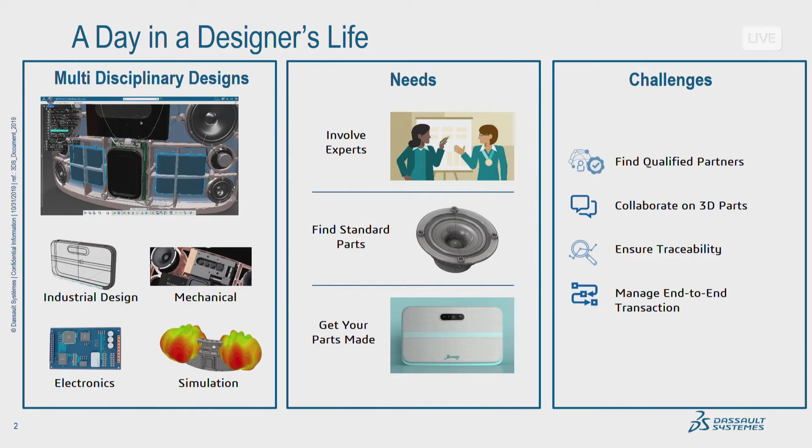The challenge we see in your usages and feedbacks is that today all the designs you do are more and more complex and involve more disciplines and expertise. Sometimes that expertise is not available in-house, or we need extra capacity. So the point is to help you find the right experts in your disciplines, find the right components for your designs, and help you get your parts made, whether this is for prototyping, functional parts, or process qualifications.

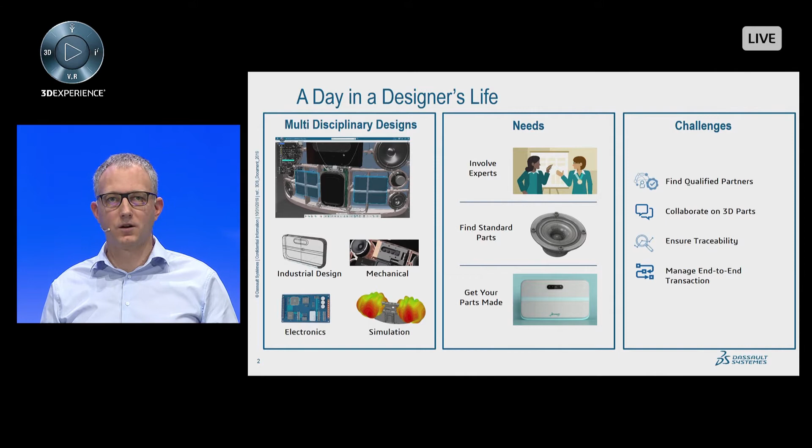And so those needs and challenges - to find the right expertise, to be able to trust the partners with whom you want to work, to collaborate efficiently in 3D on those projects, to have complete traceability of that collaboration, and to manage end-to-end transactions - are at the heart of the creation of these marketplaces that we introduced a year and a half ago, in early 2018.

So this is why we created those 3 marketplaces. The idea is really to go into dedicated domains and bring specific values into those domains, including values that are currently delivered through the applications you use daily.

Then you also have engineering, which is about on-demand engineering design, delivered by qualified ecosystems of engineering providers, engineering offices. And finally, we have PartSupply, which is the focus of today's presentation, about on-demand components to facilitate your design.

So those online services can be freely accessed online. Just go there, you have the URLs here on the screen. Create an account for free, and you can start interacting with these ecosystems for your manufacturing, engineering, or component projects.

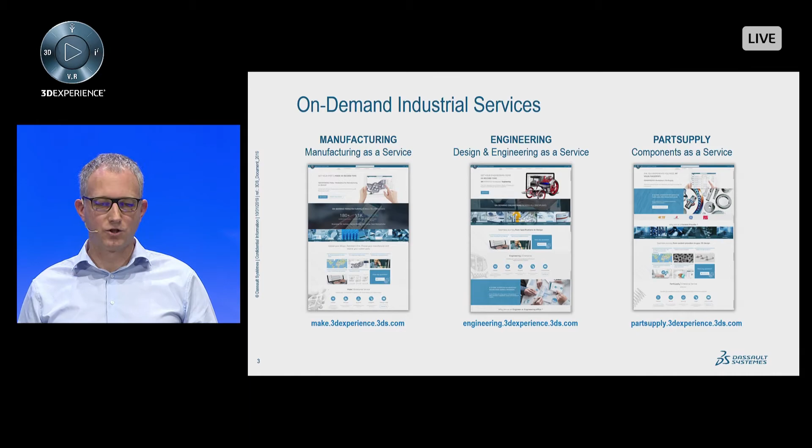Something I would like to emphasize is that those services are available in 2 flavors. The community ones are the ones just described - you go to the websites, and everyone gets access to that same ecosystem of providers qualified by Dassault Systèmes. They're also available in an enterprise version, whereby you as customers can decide to define your own ecosystem of providers with whom you want to work, whether external partners or internal resources. Then you can optimize the make or buy decisions, as well as the utilization of those in-house resources.

So we'll now hand it over to Stanislas, who will focus on the PartSupply online service and tell you more about how to source your components from this service.

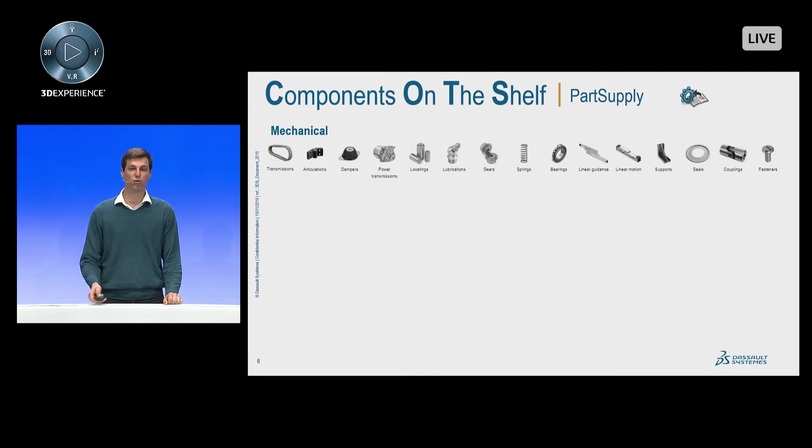Thank you, Hubert. So making PartSupply, we thought about COTS, component off the shelf. So we have bolts, screws, brackets and support, and that is our mechanical content. But we also have electrical and electronics content in PartSupply. Those are basic components, but they are mandatory in your designs.

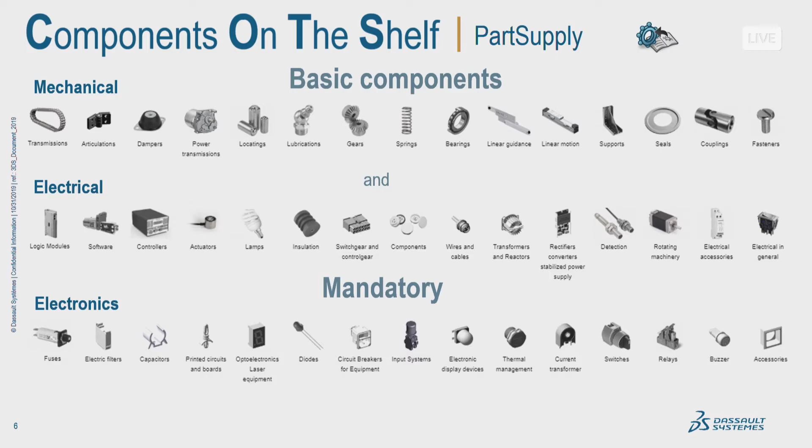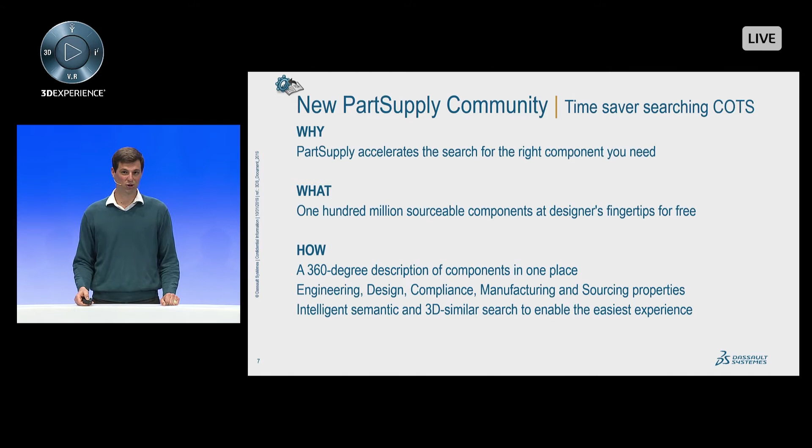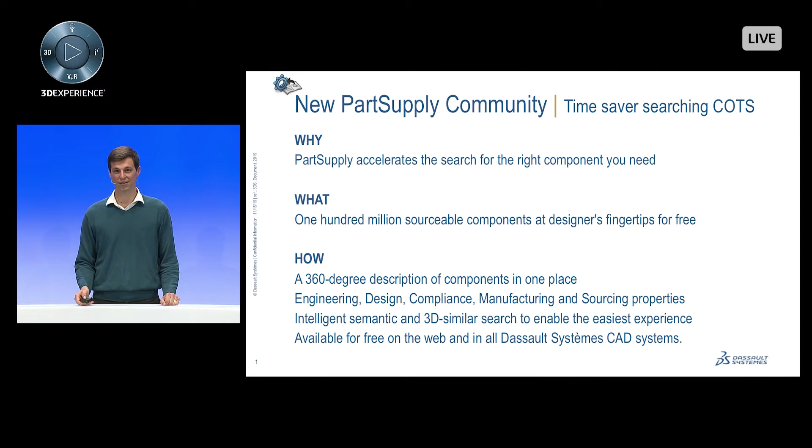That's why we made PartSupply a time saver for the designer who is looking for the right component. We have that in one place, PartSupply, with a catalog of 100 million growing number of components at the designer's fingertips. We provide a 360-degree description regarding engineering, compliancy, manufacturing, and sourcing information to fulfill your requirement. We have an intelligent semantic search, but also a 3D similar search to find your components easily, and all that is available for free on our website and in CAD systems from Dassault Systèmes.

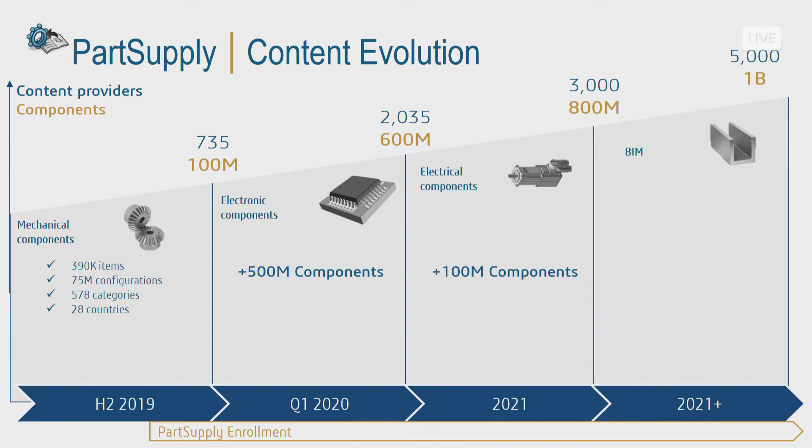I was saying growing number - 100 million parts by end of 2019 - and thanks to the new enrollment process for new suppliers, and thanks to our partnership with electrical and electronic providers, we want to reach 1 billion parts within 2 years. Now, let's take an example.

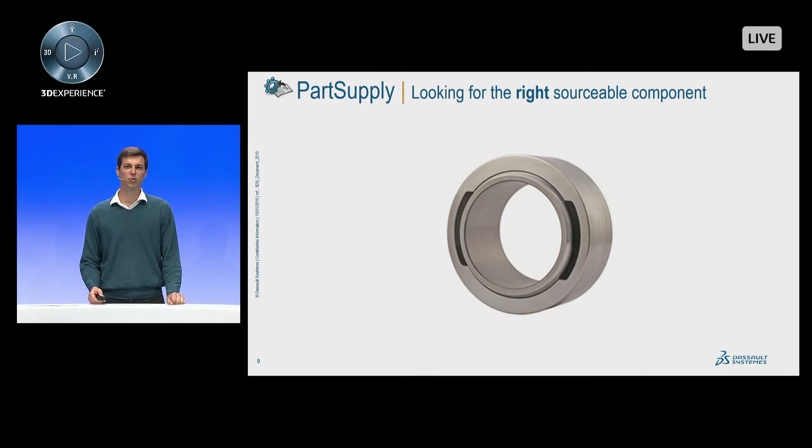In my last job, I was searching for a basic part, a spherical bearing. What do we do as designers when we need such a simple component? We need to see if it fits in our assembly. Then we have to check mechanical loads at all temperatures of service. That will get us the material, and we will have to choose the material with the right surface treatment.

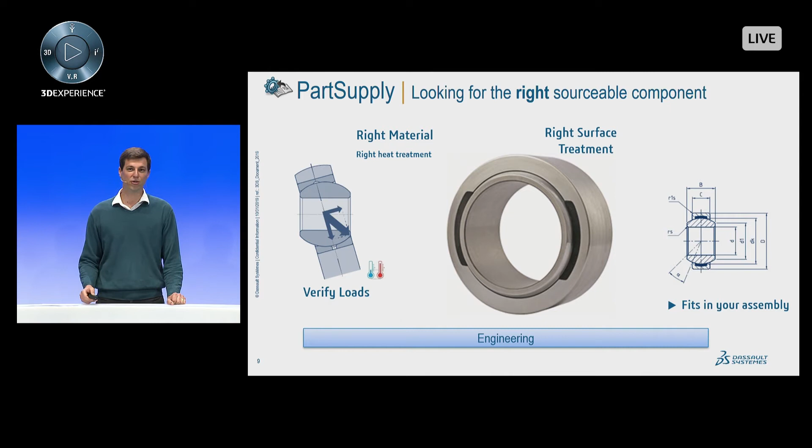That's it, all the engineering properties and documentation that is in PartSupply to help you, on the base of engineering requirements, to find the right part. So all that is in PartSupply.

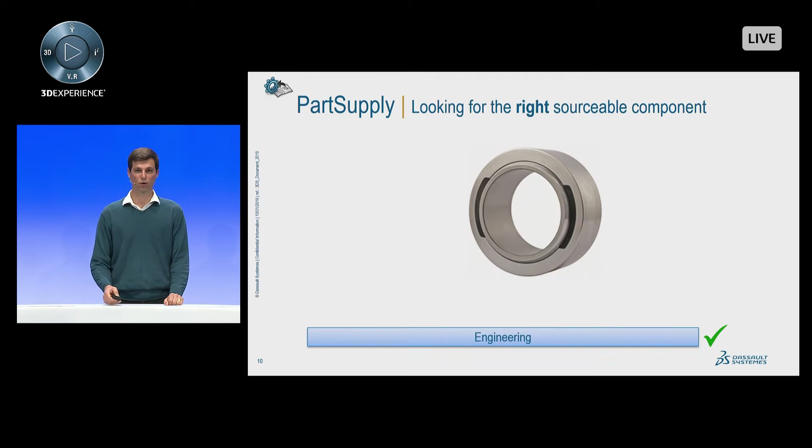But it's not enough. We have to go further and find plenty of other information to help you save time. In the same place in PartSupply, you have all what you need to find the right component from an engineering perspective, but also from a compliancy perspective. So the second type of information we get into PartSupply to save your time is all compliancy information.

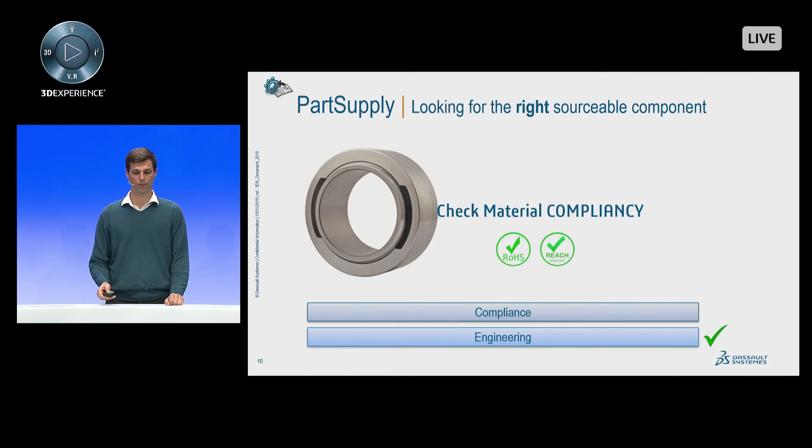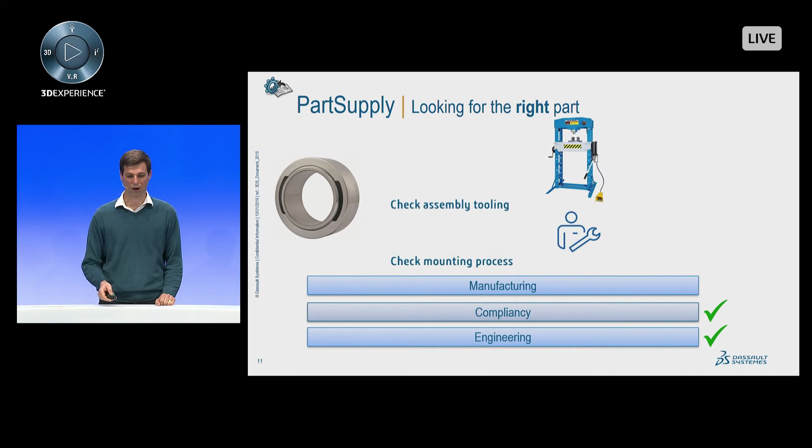And then we will also fit sourcing requirements, so it's coming there. With the list of vendors in PartSupply, with stock and prices in PartSupply, and with lead times in PartSupply, you will fit all the needs and requirements of the fourth and last facet, which is sourcing.

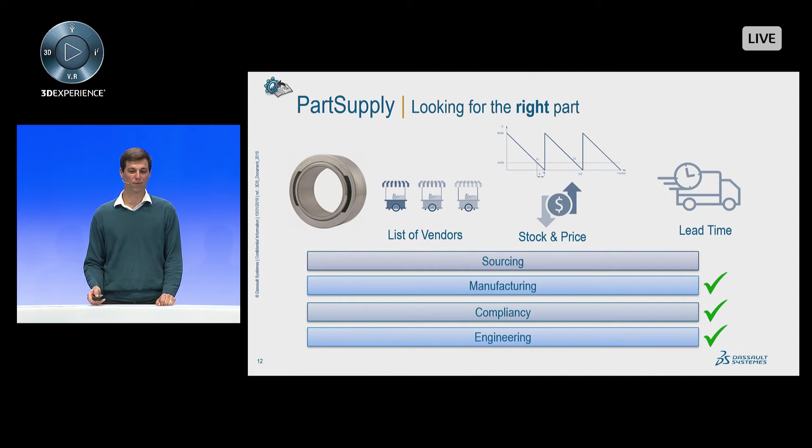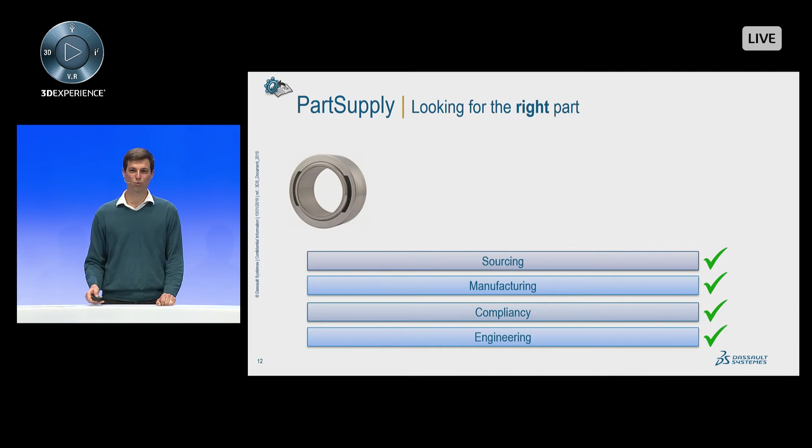So PartSupply is not only a catalog of parts, it's a place where we concatenate all updated information about sourcing, manufacturing, compliancy, and engineering. So now we have our bearing fitting all the requirements from an engineering perspective, but also from a compliancy, manufacturing, and sourcing perspective.

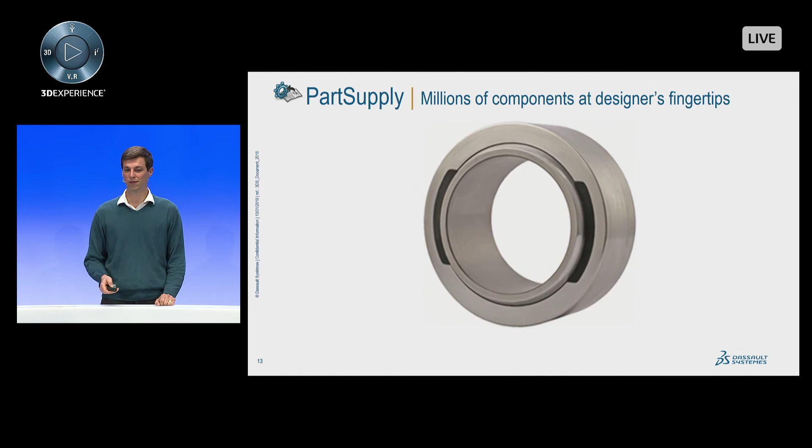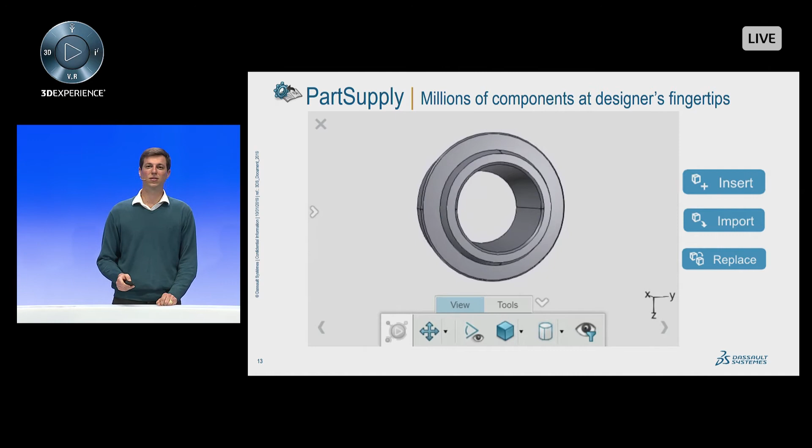Then we just have to add the 3D model so that we can insert it, replace, or just open it in the CAD systems. Then I will show you also how PartSupply is available on the web.

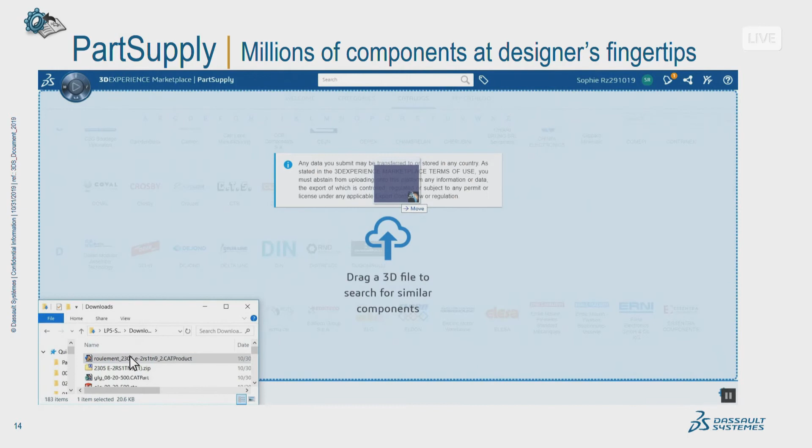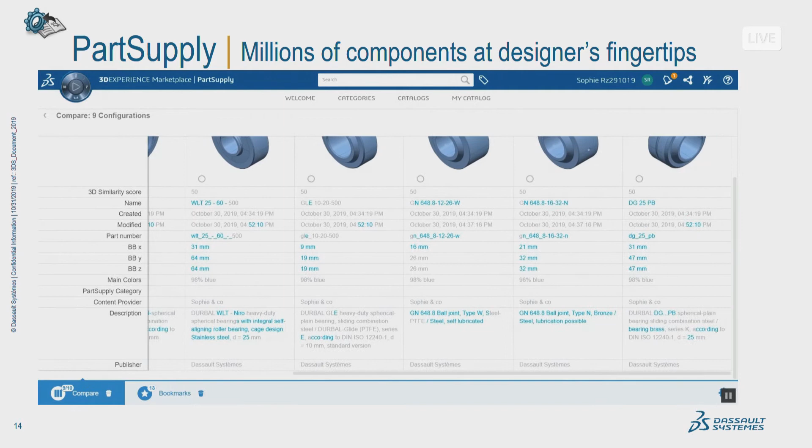Here you have the possibility to browse through catalogs. You also have the possibility to make a search by similarity. So here I took a bearing, and we can see the list of bearings. We can compare all the attributes and choose the right bearing based on all the attributes and documentation.

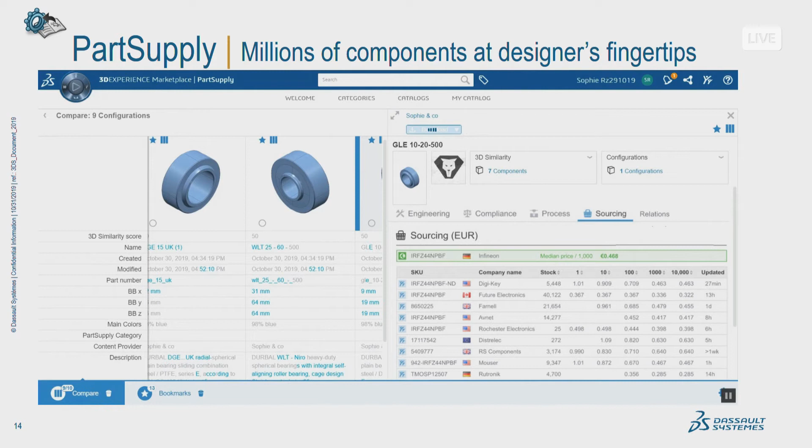We have the list of similar parts for each bearing, and then we see engineering properties and compliance, process, sourcing relations information that permit, for example, finding a vendor for the part, having stock and prices updated - information that is really volatile and always updated in our PartSupply.

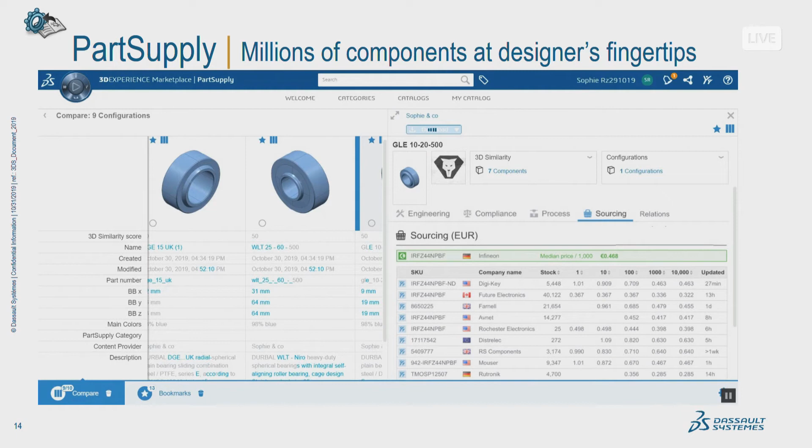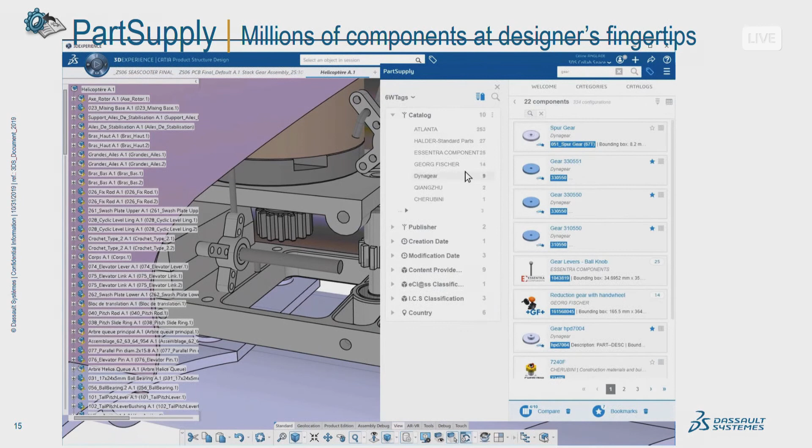Then we'll switch to CAD because we also have access to PartSupply in CAD. So here let's take a helicopter where we will have to insert a gear. Finding it in PartSupply is really quick with a great experience of semantic search. Here we just have to select the part and then insert it in our CAD.

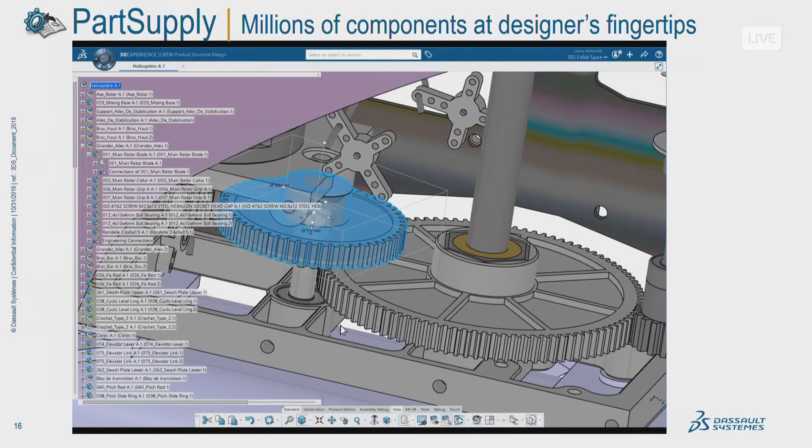We can also play with the 3D player to be sure we will insert the good part, and there it is. And then in PartSupply we also have the capability in the CAD system to replace a part.

So here, for example, you have a bearing that you want to find on the market. We just have to select it and make a 3D similarity search. So it will give you all the alternatives on the market for that bearing.

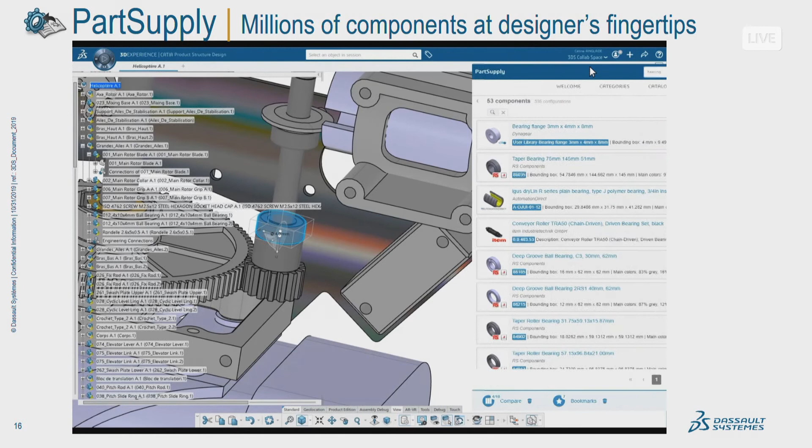So you can use the tagger to filter and specify your search, and then select a part. Again, play with it in the 3D player to make sure it is the right one for you, and then replace the old part in your design.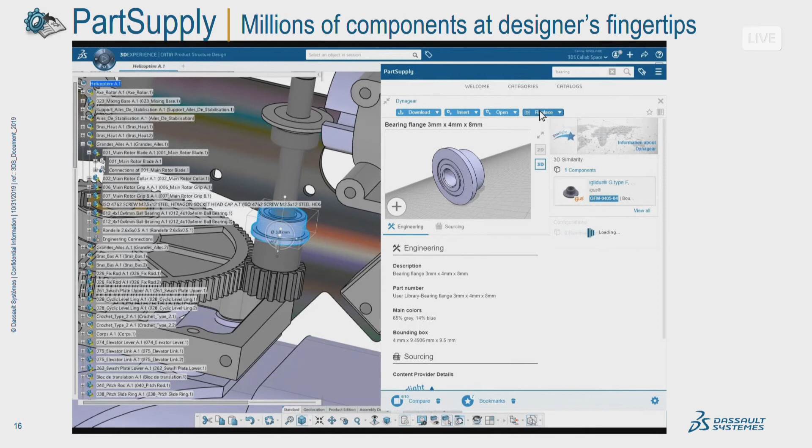Here it is. With PartSupply, we also have, as Hubert said, an enterprise version. It provides the same information, all the same content that is free in the PartSupply community for all web users and CAD system users. But it permits enabling the strategy of the company in matters of standardization and sourcing.

All the information we have - engineering information - will permit optimizing the choice from an engineer's point of view, also compliance from a compliancy manager's point of view, and manufacturing and sourcing will also permit optimizing the following steps of procurement and production.

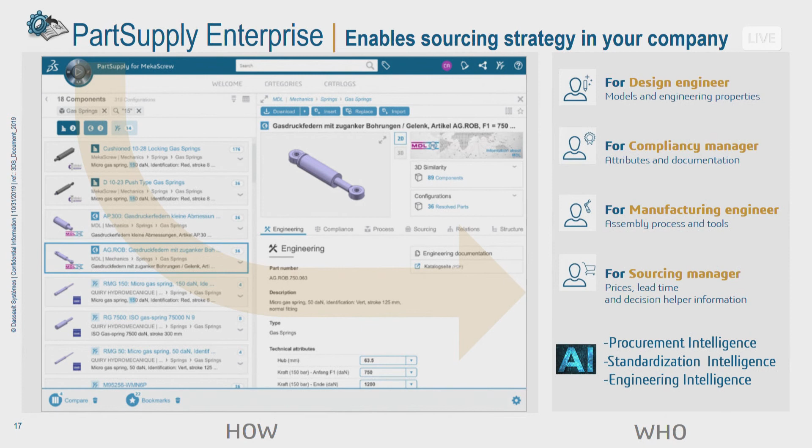In the enterprise application, we also have AI data-driven services that permit optimizing procurement standardization and engineering choices for the right component. Now I've finished the presentation of PartSupply.

I hope you enjoyed it, and please take away that we are here to save your time. PartSupply is an acceleration to find the right component.